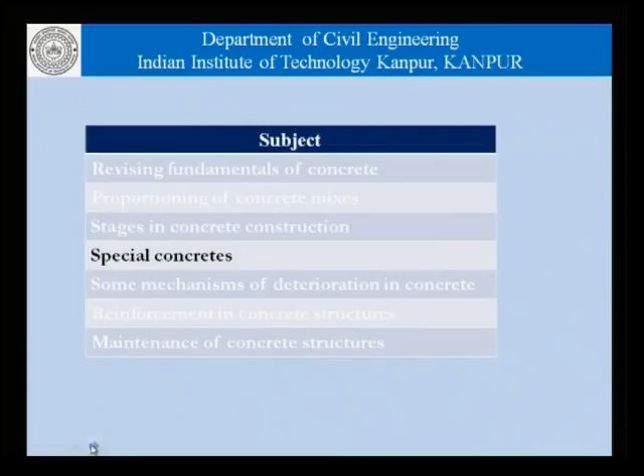Continuing our discussion on special concretes, where we were talking about high workability concretes in the last class, we had developed the following ideas.

Concrete, mortar and paste can all be modeled as a composite having a fluid phase with particles suspended in them. Paste can be modeled as cement particles suspended in water, mortar as sand particles suspended in paste, and concrete as coarse aggregate suspended in mortar. The properties of the composite, whether paste, mortar or concrete, can be determined by the properties of these two phases - in the case of concrete, the properties of the aggregate and the mortar, and also the volume concentration of the particles.

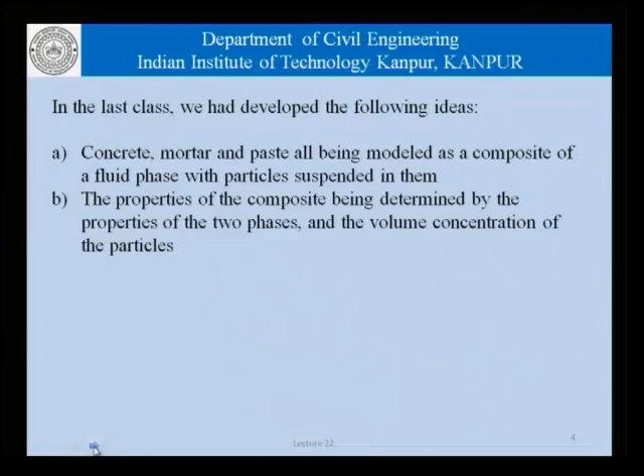That is, if you are talking of concrete, how much coarse aggregate is there in the composite by volume. We had also talked about the problems of segregation and particle interlock in the context of the carrying capacity of the fluid, the conditions of flow, and so on.

We have talked about the properties of the fluid phase, which can be modified by changing the concentration of particles therein, and superplasticizers help us directly in that context, and also using viscosity modifiers.

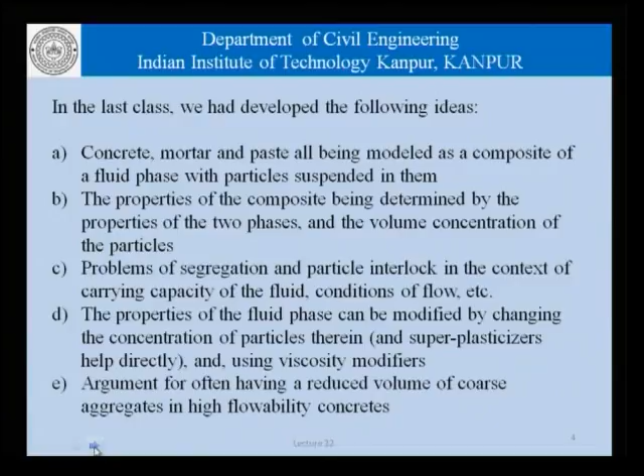We had also built an argument for having a reduced volume of coarse aggregates in high flowability concretes. In fact, there was a slide where we had said that depending on the concentration of reinforcement or the complexity of the shape in which the concrete has to be cast, the maximum volume of coarse aggregate in the concrete can be limited or needs to be limited.

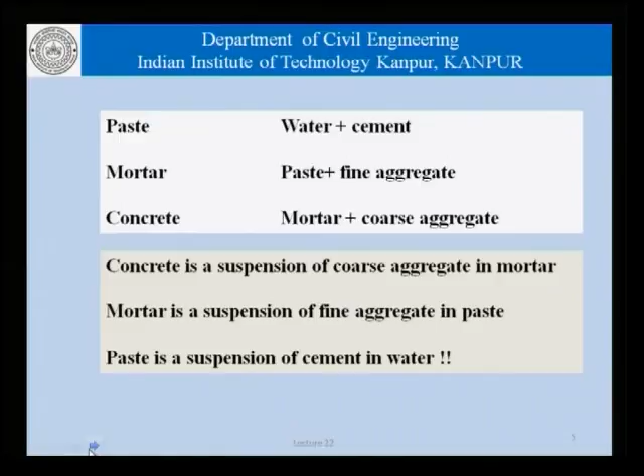Continuing with that discussion and reiterating that paste is water and cement, mortar is paste and fine aggregate, concrete being mortar and coarse aggregate, and the suspensions as we have discussed.

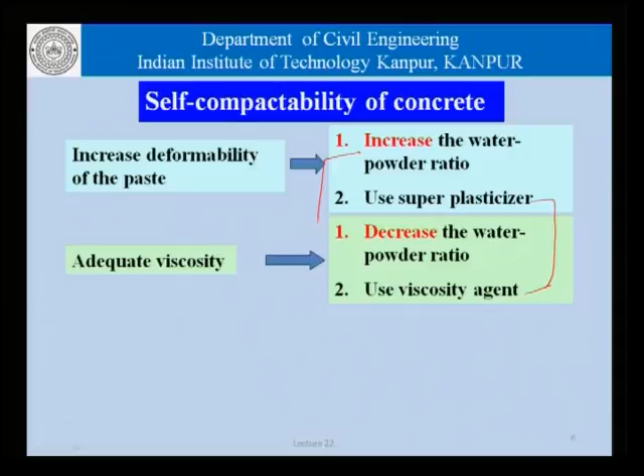We now talk about self compactability of concrete, where we said that on the one hand we need increased deformability of the paste, which calls for an increase in the water to powder ratio and the use of superplasticizers, and on the other hand we require adequate viscosity, for which we need to reduce the water powder ratio and use viscosity agents. So these two are the chemical admixture route, or the physical route where we are trying to change the water powder concentration in the system.

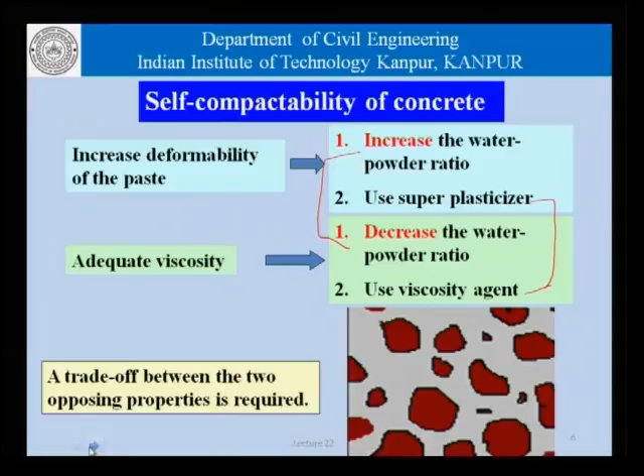Now, as far as the self compactability of concrete is concerned, or the high flowability of concrete is concerned, we are really looking at a trade off between these two opposing properties. One requires the paste phase or liquid phase to be more deformable, whereas the other requires the same phase to be less deformable. So it is basically a trade off.

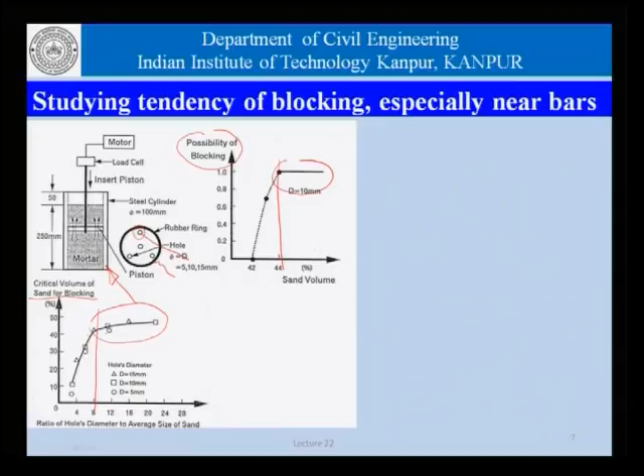Building on that argument, we had discussed this slide, which talks about the possibility of blocking and the critical volume of sand required for blocking if we were doing an experiment as shown here, where in a small cylinder we are trying to push a piston which has a configuration like this, having holes of different diameters, and these diameters are related to the particle size that we have, and we had talked about a sudden change occurring here and a relatively sudden change which is occurring at around this value here.

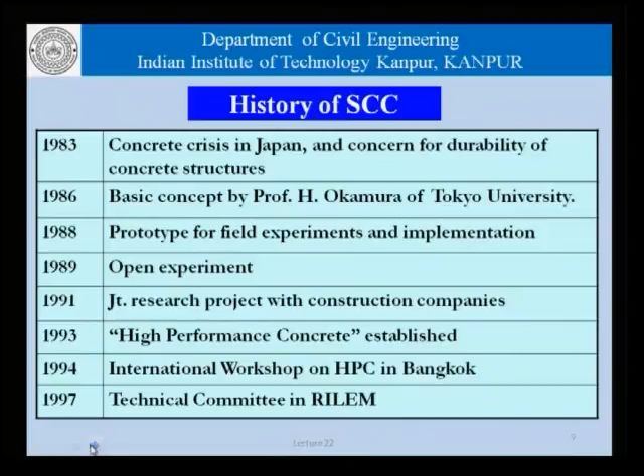We had also talked about the history of self compacting concrete briefly, starting from about 1983-84 to about 1997, an extensive amount of work was done in Japan and in other countries, notably the Netherlands, where the emphasis was on developing high deformability, high flowability and self compacting concretes.

On the other hand, there was a discussion and groups in the world working on high performance concrete interpreted slightly differently. They were working more in terms of increasing the strength of concrete. Now, coming to our discussion today, we will focus on

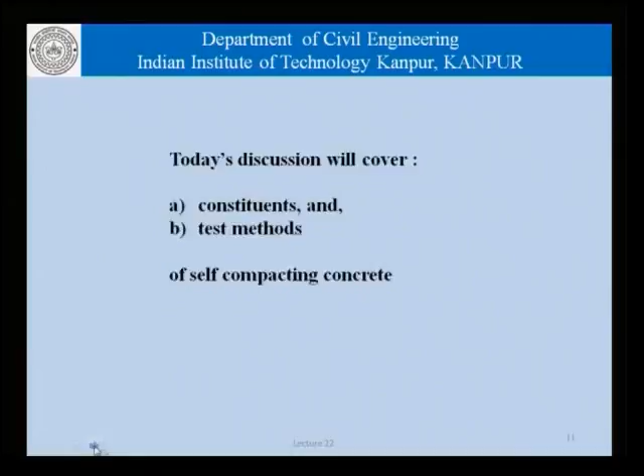self compacted concrete, that is SCC, one of the examples of high flowability concretes. In this case, in addition to high flowability, the concrete should have self compactability, that is, it should not require external vibration in order to be compacted. We will cover the constituents and the test methods of this special concrete. As far as what SCC is, it really is a flowing concrete mix that does not require additional or external work for consolidation in terms of internal or form vibrators, and consolidates under its own weight.

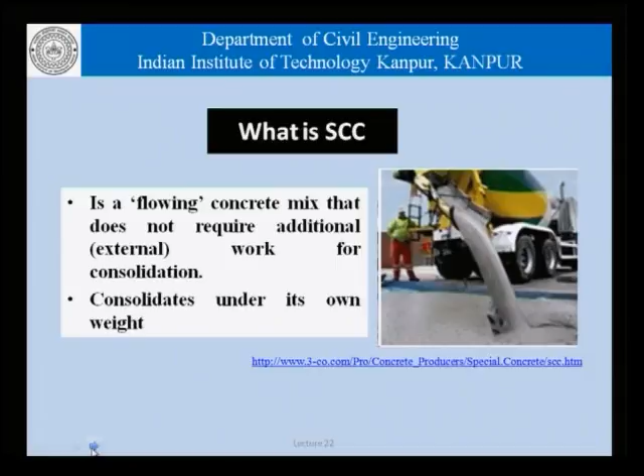So, as we can see from the picture here on the right, the concrete more or less flows as if it were a fluid. Now, the advantages of working with this kind of concrete, self compacting concrete, is that its highly fluid nature makes it eminently suitable for placing in difficult conditions, which could be sections with congested reinforcement, hazardous environments, and so on.

At times the arrangement of reinforcement is such that it makes it very difficult for concrete to be placed, for concrete to move through the reinforcing bars, and even if concrete can negotiate that gap, it is almost impossible to actually have a vibrator reach that area.

Similarly, there could be hazardous environments where we would like to limit the amount of exposure to human beings. We would like to have as few people working in that area as possible, and in these cases the use of self compacting concrete comes in very handy.

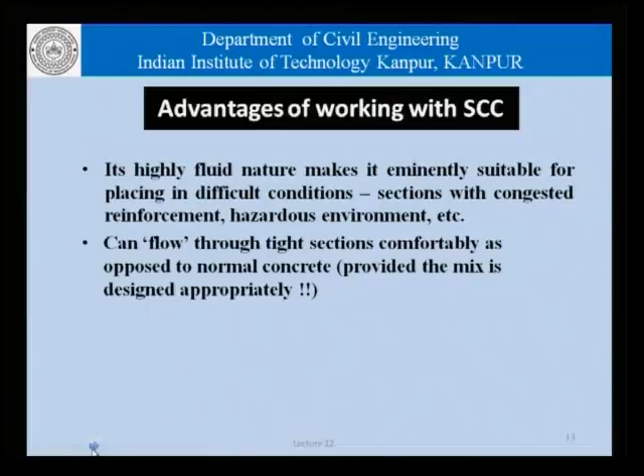As we said, it can flow through tight sections comfortably as opposed to normal concrete, of course, provided the mix is designed appropriately and has the right amount of segregation resistance.

It minimizes hearing related damage induced by the vibration of concrete at the work site. The use of vibrators, whether internal vibrators or form vibrators, is one of the major sources of sound pollution at a construction site, and if we are able to get rid of that, we have a much more silent construction site.

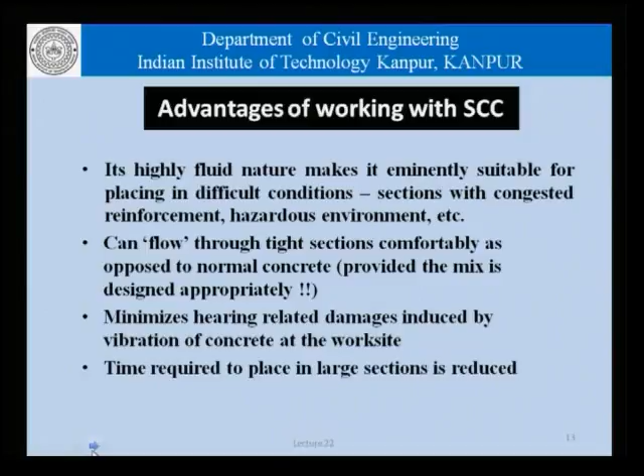Indeed, the time required to place concrete in large sections is also greatly reduced, because the concrete virtually flows rapidly into the form that is being cast in.

Here are examples where self compacting concrete would be eminently suitable. For example, if we look at this picture here, we can see that the reinforcement is so dense that it would be impossible for concrete to penetrate these small patches between the reinforcing bars, save the self compacting or a very highly deformable concrete.

Only that concrete which literally flows like water can be poured into the formwork, and it can be expected that it will flow through these openings or gaps and set in a manner that a reinforced concrete designer would like it to.

On the picture here is the anchorage of the 4A of the Akashi Kaikyo bridge, one of the major bridges in Japan, and I would like you to understand or study a little bit more on how the self compacting concrete was used in this large anchorage.

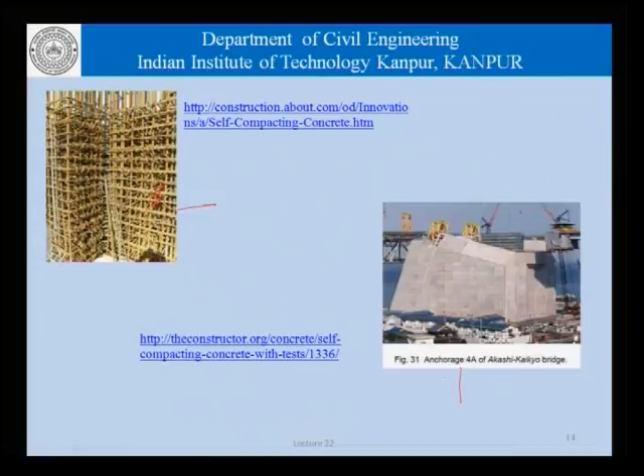As far as the ingredients of self compacting concrete are concerned, they are no different from the usual: cement, other cementitious materials, fly ash, blast furnace slag, microsilica, stone dust, aggregates which is fine and coarse, and admixtures.

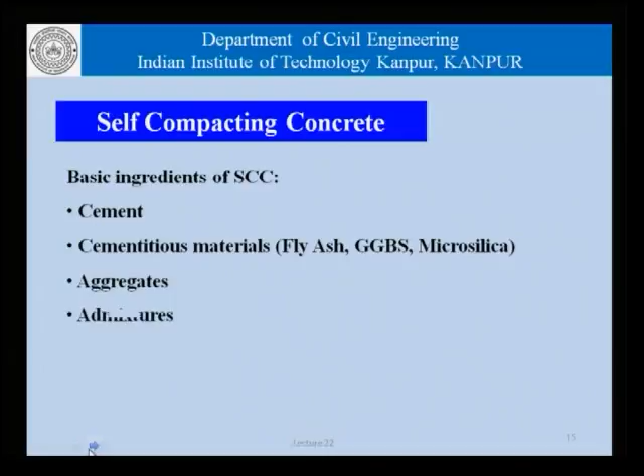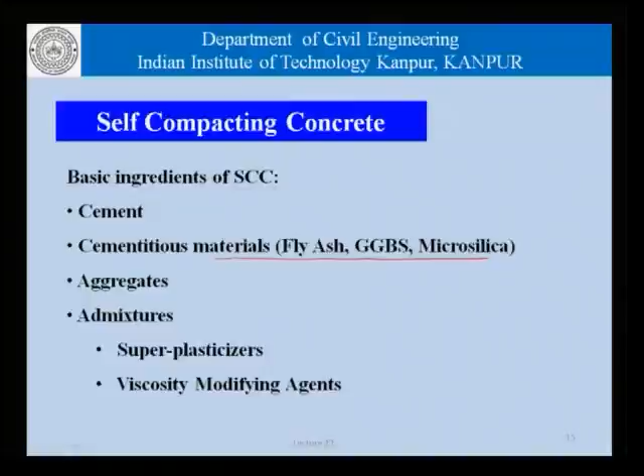These could be superplasticizers or viscosity modifiers. Now, we land up using a lot of these cementitious materials in self compacting concretes for the simple reason that we need to have a higher volume of paste, a higher powder content in the mix. This is something which we talked about last time, and we will look at it once again today.

As far as cement is concerned, we can obviously use almost any type of cement. The typical cement content is no different from normal concrete. It is about 350 to 450 kgs per cubic meter.

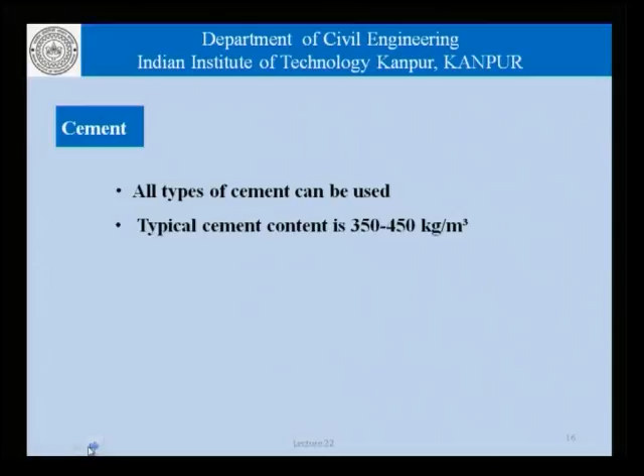And if we use higher cement content, obviously, we will land up with higher shrinkage and thermal stress issues. Therefore, even though we require a higher paste volume or a higher powder volume in the paste, it is not always advisable to use cement.

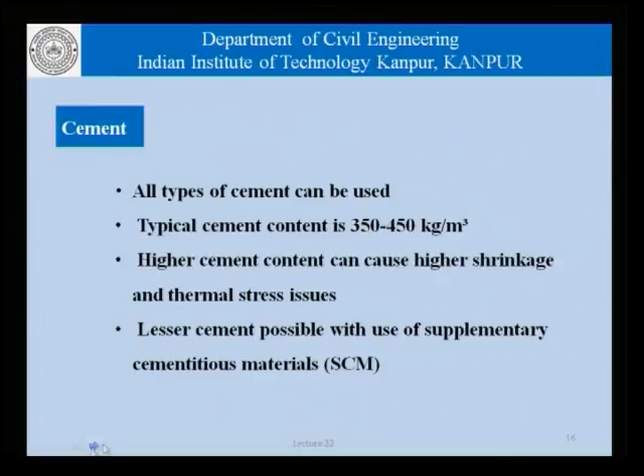We would rather use materials of similar fineness, but not having the hydration related issues in terms of heat and so on. As we have stated, lesser cement content is possible by the use of these supplementary cementitious materials.

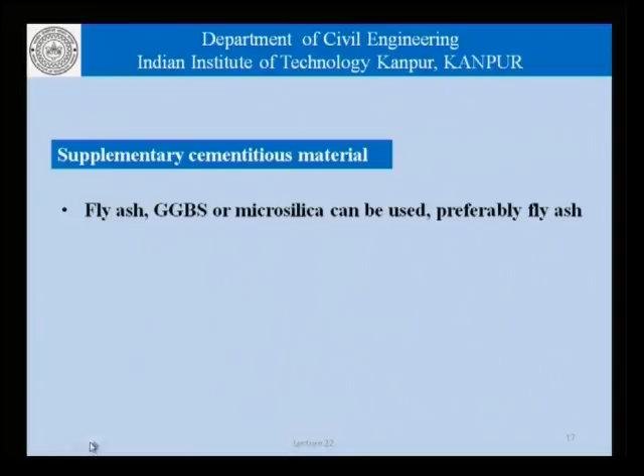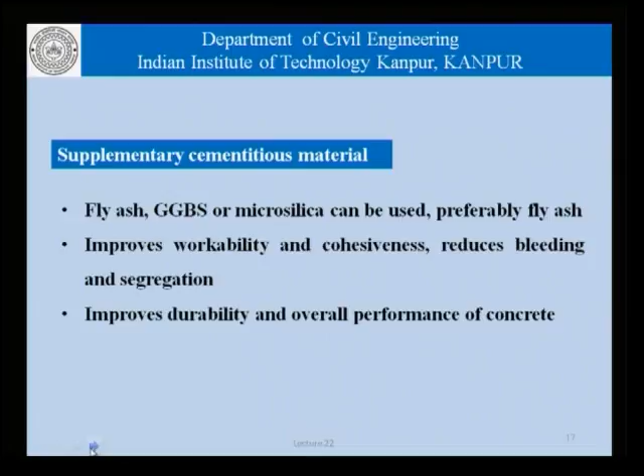As far as these materials are concerned, we could use fly ash, blast furnace slag, or microsilica, preferably fly ash because of its spherical nature. Their use improves the workability and cohesiveness, reduces bleeding and segregation, improves durability and overall performance of the concrete.

As far as the viscosity modifying admixtures are concerned, these are of various chemical nature and provide or correct the desired rheological profile to the self-compacting concrete. They improve the segregation resistance of the mix without loss of workability.

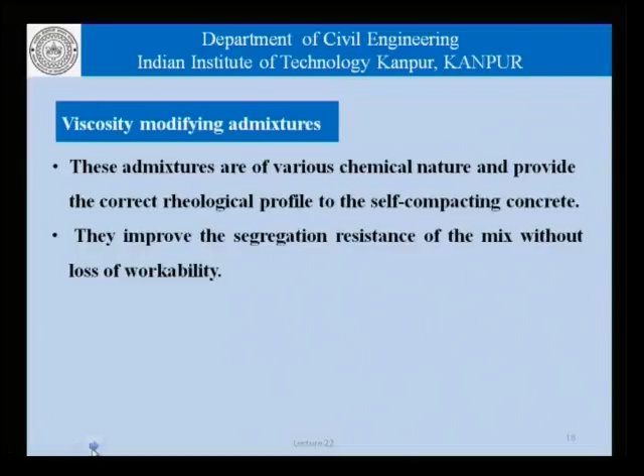They also help to reduce performance fluctuations due to variations in the material quality and the moisture in the aggregates. This helps us maintain a consistent quality as far as self-compacting concretes are concerned.

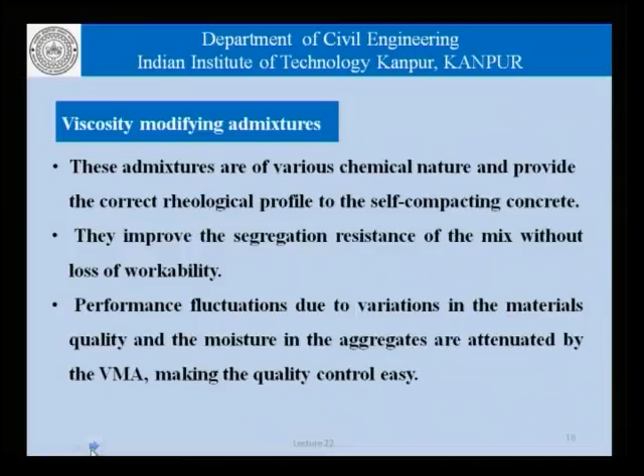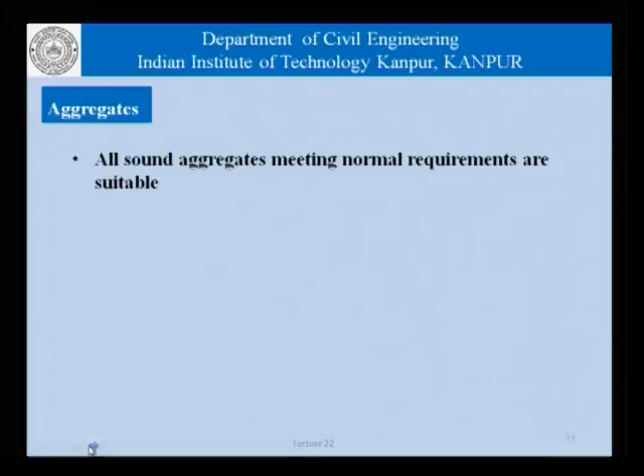Coming to aggregates, all sound aggregates meeting normal requirements are suitable. We must remember that with a material like concrete, it is very difficult to specify very special kinds of aggregates, whether fine or coarse, because concrete as a construction material is economical only if we use locally available material to the extent possible.

The only factory made product used is cement, and that is where we can have some specification that this cement and not that cement, this particular chemical composition and not that one, and so on. But if we become very choosy with respect to aggregates, that will push the cost of concrete beyond a certain point and make it uneconomical. So, no matter how special the concrete becomes, the engineer always tries to use local material, and to that extent all sound aggregates meeting normal requirements are suitable for use in self-compacting concretes as well.

These aggregates could be natural or crushed aggregates of any mineral composition - limestone, dolomite, quartz, basalt, whatever - except that the usual rules as far as alkali aggregate reaction will apply. We do not want to use reactive aggregates.

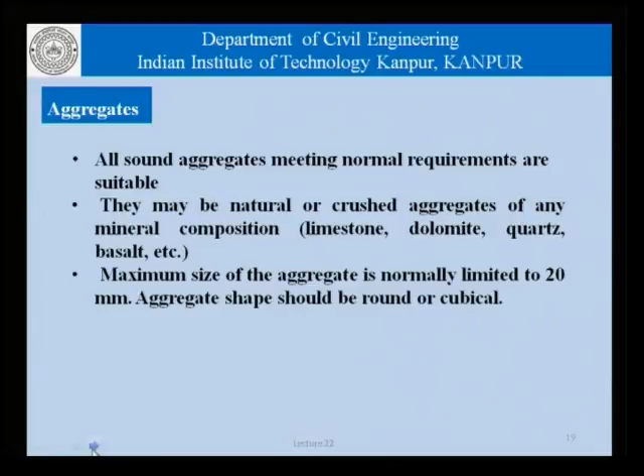As far as the maximum size of the aggregate is concerned, that is normally limited to about 20 mm, and aggregate shape should be round or cubical. This is something we need to be a little careful about as far as its use in self-compacting concrete is concerned.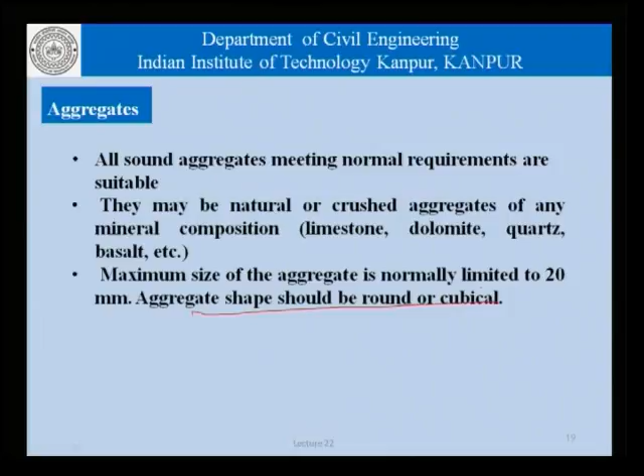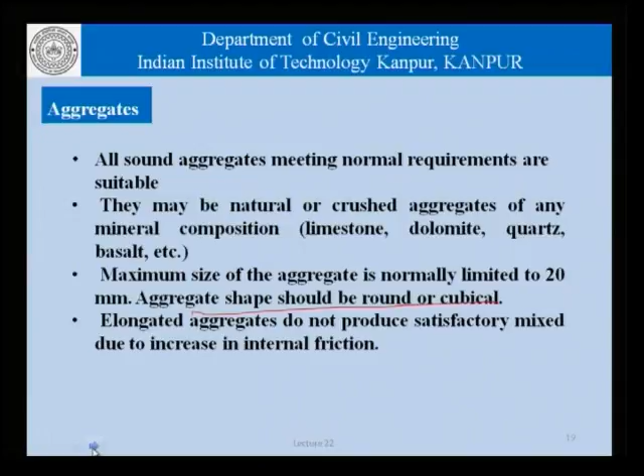Elongated aggregates do not produce satisfactory mixes due to increased internal friction and their tendency for aggregate interlock. That is something we would like to watch out against in self-compacting concretes. In normal concretes, because we use vibrators, we have the possibility to break aggregate interlocks, but in self-compacting concrete we cannot afford that.

Similarly, we cannot afford aggregate interlock in equipment or in piping and so on. So we must ensure that as far as aggregates are concerned, they are at least rounded or cubical in nature.

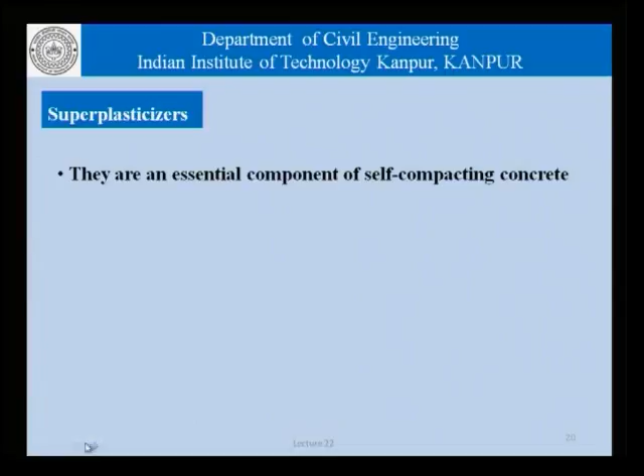Coming to superplasticizers, they are an essential component of self-compacting concrete because they help us reduce the water content. As far as these admixtures are concerned, normal sulfonated melamine formaldehyde, naphthalene formaldehyde condensate, and polycarboxylic ether based superplasticizers are commonly used.

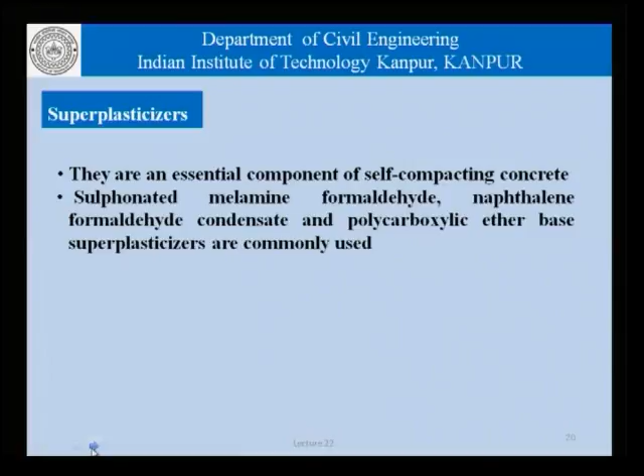Depending on the chemical composition of the cement, there may be issues relating to compatibility of a particular admixture with the cement, and that is something which needs to be established from time to time at a construction site.

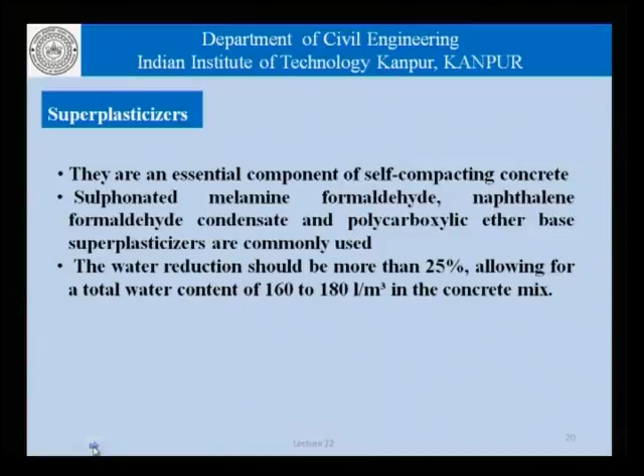As far as these admixtures are concerned, the water reduction achieved should be about 25% or more, so that the total content of water is restricted to about 160 to 180 liters per cubic meter. Anything more than that would make the demand on the powder content simply too high.

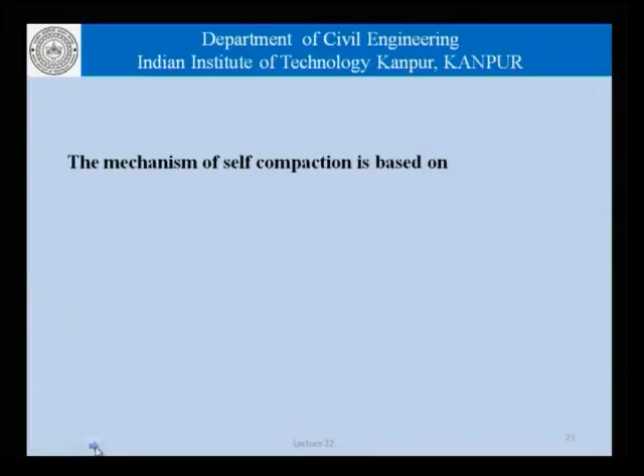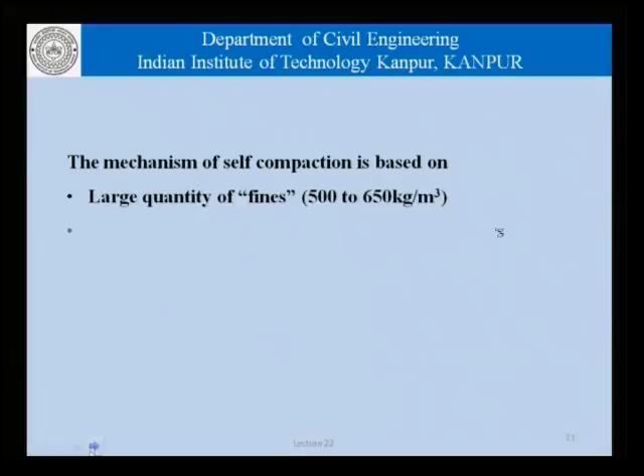Now, the mechanism of self-compaction in self-consolidating concrete is based on the large quantity of fines of the order of about 500 to 650 kgs per cubic meter, the use of high range water reducing superplasticizers in the range of more than 25% water reduction, and viscosity modifying admixtures. So it is these three principal factors, or a combination of these factors, which helps us obtain self-compactability in concrete.

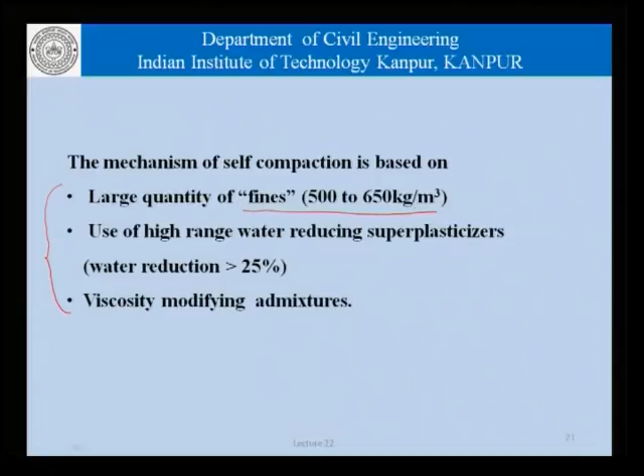So when we are talking of a large amount of fines, we can imagine that if we are looking at 500 to 650 kgs per cubic meter of fines, this is not including the fine aggregate. This is really the fines in the sense of cement and particles which are of similar size. So we cannot obviously have this amount of cement sitting in a concrete matrix.

So the cement content has to be restricted to about 350 to say 450, and therefore, by the requirement of self-compactability, we need to have at least 200 to 250 kgs per cubic meter of either a supplementary cementitious material which will participate in secondary pozzolanic reactions or secondary hydration, or a material which, even if it does not participate in that secondary hydration, contributes to increase the viscosity of the paste phase.

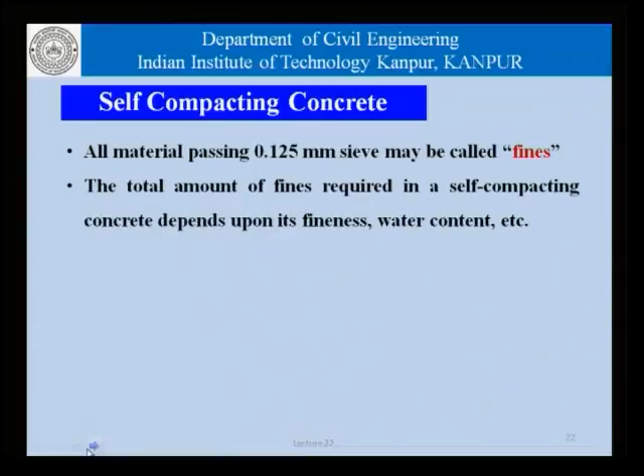Now, coming to self-compacting concrete, all material passing through a 0.125 mm sieve may be called fines, and that is how we were trying to define fines in the previous slide. The total amount of fines required in a self-compacting concrete depends upon its fineness, the water content, and so on. Pozzolanic materials will contribute to strength, and their effect should also be considered in the mix design.

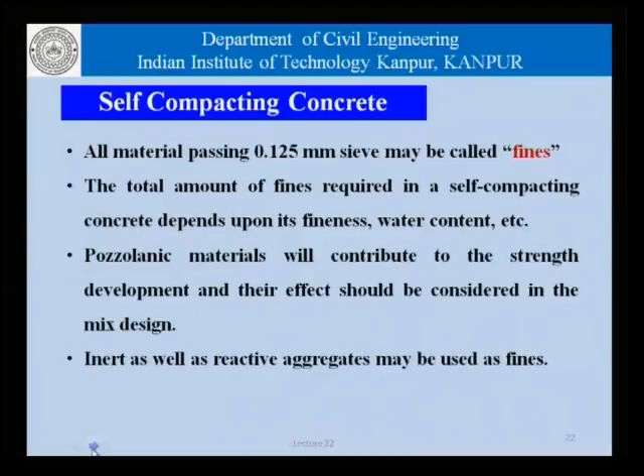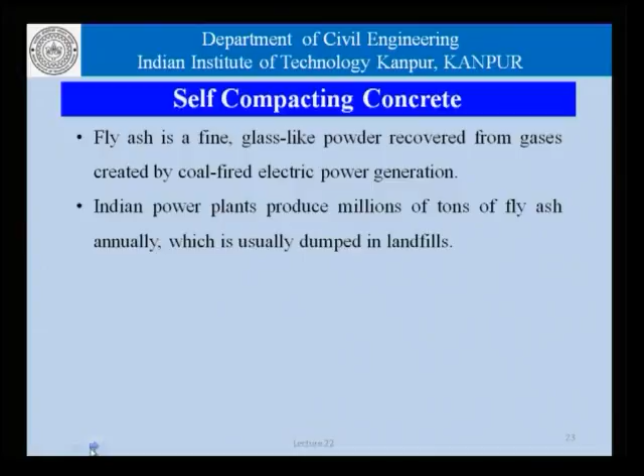Of course, we could use inert as well as reactive aggregate sometimes in fines, but with caution. Now, fly ash is one of the most commonly used supplementary cementitious materials and is a fine glass-like powder recovered from flue gases created in a coal fired electric power generation or thermal power plant. As far as India is concerned, we produce millions of tons of fly ash, but it is usually dumped in landfills.

Fly ash is an inexpensive replacement for Portland cement in concrete, while it actually improves the strength and segregation resistance and also the ease of pumping. Of course, it should be noted that not all fly ash can be used.

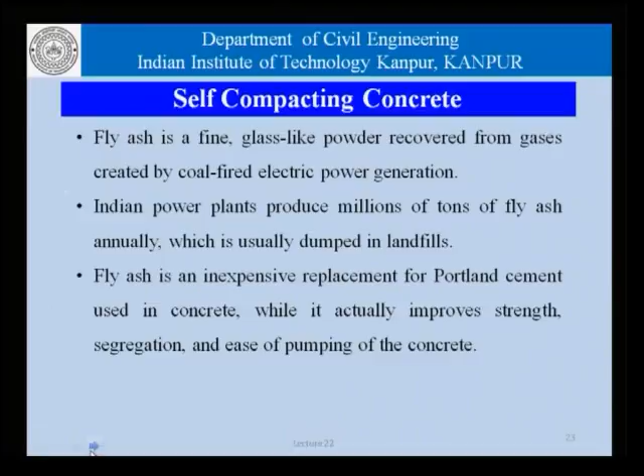It is not only the size and reactivity that matter, but also the fact that the properties depend on the coal which is used, the fineness, the burning temperature, and so on. So if there is a lot of variation in the quality of coal used in a thermal power plant, the quality of fly ash is also likely to vary.

This variation is one of the reasons why fly ash has not really become an absolute replacement for cement. Sometimes we get very good fly ash, and sometimes we do not get such good quality. That is why, as far as specifications and engineers are concerned, we cannot make a blanket statement that we can use large volumes of fly ash in a given concrete. Of course, if an engineer is conscious of that and does periodic quality control, there is absolutely no reason why fly ash cannot be used.

It is an ideal material for self compacting concretes. Now, if we look at the typical mix proportions by weight of normal concrete and self compacting concrete, these numbers here are those for normal concrete, and these numbers are for self compacting concrete. We are able to see the proportions by weight for both mixes.

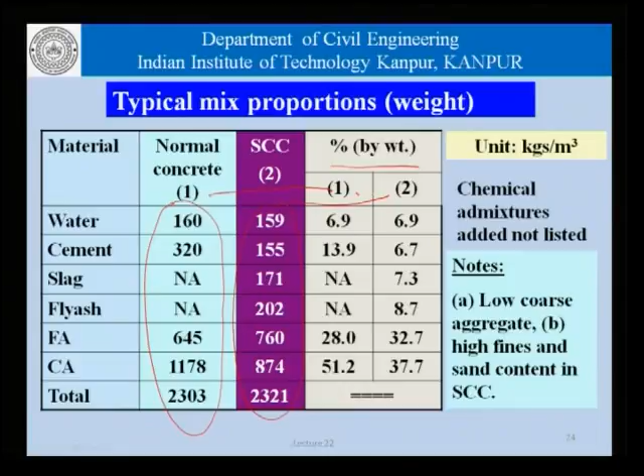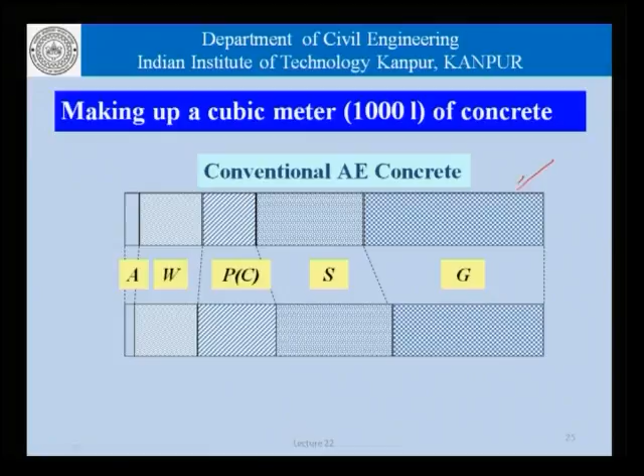Now, if this data was converted to a volumetric chart showing air, water, powder or cement, sand and gravel, this here is the distribution as far as normal conventional air entrained concrete is concerned, and the picture below is that of a typical self compacting high performance concrete.

If we look at the numbers, in both cases we can assume the air content is not really different, it is the same 2%, and water is about the same. As far as powder, cement or fines is concerned, there is a marked difference: about 10% in conventional concrete, whereas in self compacting concrete it could be as high as 18 to 20%. The sand is not really so much different, and this increase is compensated by a corresponding decrease in the coarse aggregate percentage.

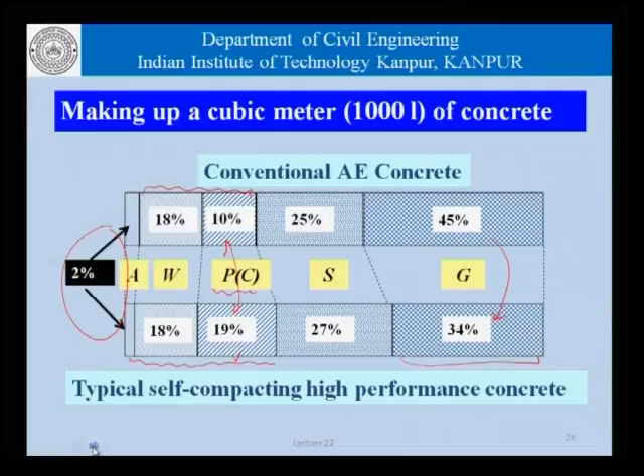So in the end result, self compacting concretes have a larger paste volume compared to conventional concretes, and this is compensated by the reduced volume of coarse aggregates. This is something we talked about last time, and we had also seen a slide talking in terms of limiting the coarse aggregate content between 28 to 35%, depending on the complexity of the formwork or the member in which self compacting concrete is to be cast.

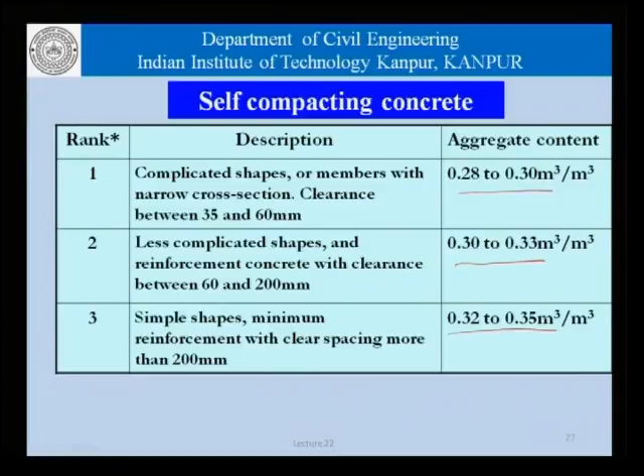This ranking given here, rank 1, 2 and 3 for the aggregate content, is based on tests for self compactability, and the level of resistance at obstacles is varied for the tests in the three ranks.

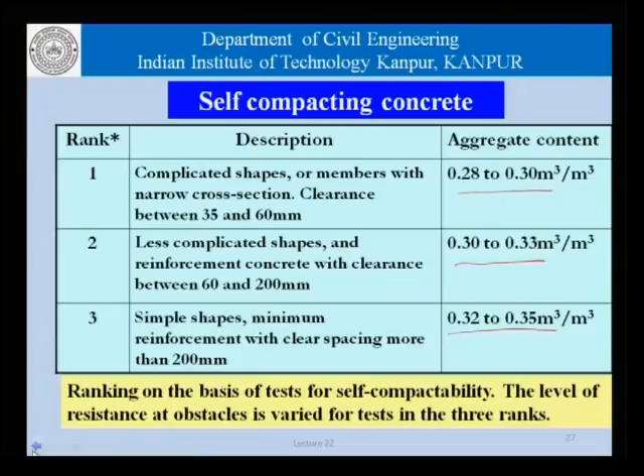Now, when it comes to testing of self compacting concrete, that is really the second part of our discussion today. Let us talk about how we actually test self compacting concretes, which is different compared to conventional concretes. Conventional concretes we test in terms of workability and air content, maybe sometimes bleeding tests or setting time and so on. As far as workability is concerned, we do slump, compaction factor and so on.

But when it comes to self compacting concretes or high flowability concretes, the material is beyond the classification range of a slump test. We need more specialized tests, and that is what we are going to talk about. Some of the tests we will discuss today are the slump flow, the V funnel, the L box, the U box, the fill box, and the J ring.

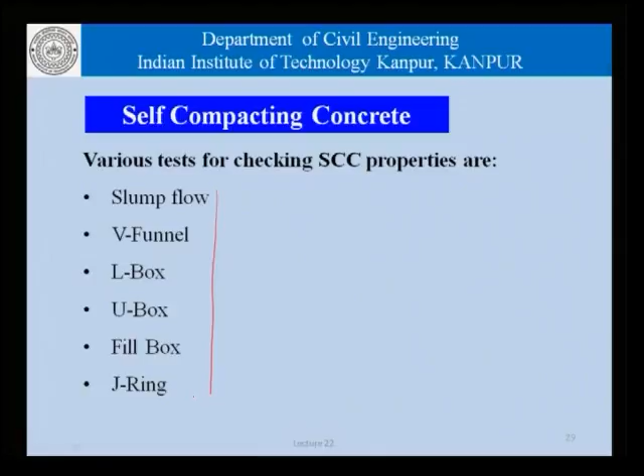These tests give us an entirely different framework in which a self compacting concrete can be evaluated. We must remember that self compacting concrete has been developed only about 25-30 years ago, and therefore a lot of these tests are still in some form of development. Some have been standardized, and you can look up ASTM or European standards on that, but some are still evolving and would sooner or later become part of a standard quality control regime for quality assurance programs of self compacting concretes. It is not only self compacting concretes, but these tests can also be used to evaluate the workability of any other high flowability concrete. Air content and so on can be tested in a manner similar to conventional concrete. Now let us take a look at these tests one by one.

Coming to the slump flow, the test aims at investigating the flowing ability of the self compacting concrete and measures the spread, the diameter of the slump being a measure of that flowability, and indicates the free unrestricted deformability of the concrete.

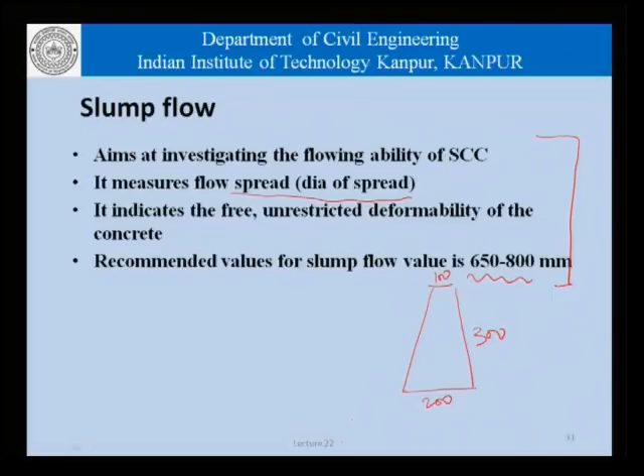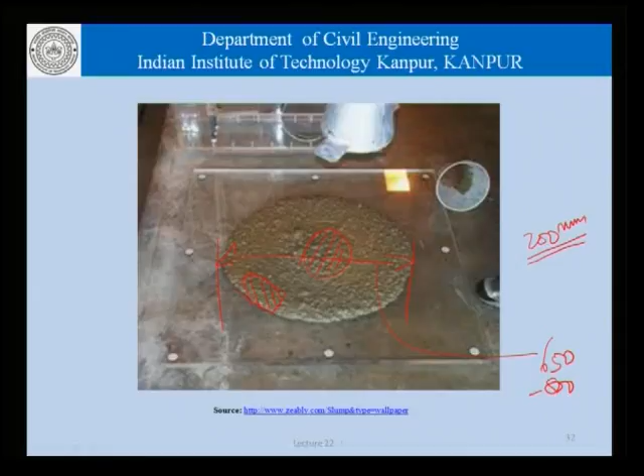When we are evaluating the concrete using the slump flow, we should also watch for aggregates having reached the edges. It should not happen that the concentration of aggregates in the periphery of the slump flow spread is different from the aggregate concentration in the center - that is what is likely to happen if the concrete is segregation prone. If the concrete is segregation prone, the aggregate would not move with the mortar towards the periphery.

As a corollary to the slump flow test, we also sometimes use a flow time, which is sometimes called the T500 test. This T500 refers to the time it takes for the concrete to achieve or reach a diameter of 500 millimeters, and the typical time could be in the range of 2 to 5 seconds. As the slump cone measuring 200 millimeters in diameter is lifted, the concrete spreads in all directions, and we look at the time it takes for the concrete to reach a diameter of 500 millimeters - this time is called the T500.

Depending on the kind of viscosity of the mortar, it is possible that for the same slump flow - the final diameter that the concrete achieves - the T500 times could be different. Obviously the T500 would be higher for a concrete which is more viscous, and the concrete being more viscous really means that the mortar phase has a higher viscosity. So even though we are not measuring viscosity directly, parameters such as the T500 help us to determine and compare the viscosity of two concretes which have the same or different slump flows or final spreads.

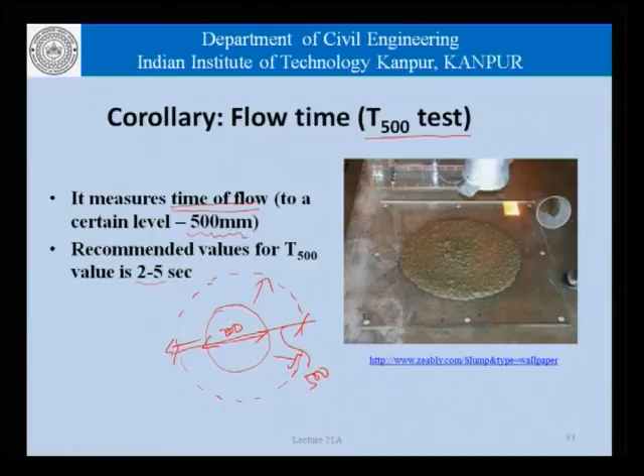Now, if we look at the slump flow test once again, we would realize the import of the free unrestricted deformability. The concrete in the slump cone, as it flows out, is unencumbered - it flows out freely without any obstacle or obstruction to its flow, and that is not something we have in most reinforced concrete structures. In most cases, the concrete is expected to negotiate reinforcing bars, and that is something the slump flow itself does not measure. So most of our tests beyond this point have this parameter added into the testing regime.

Now, if we come to the V funnel test, the test gives us the time for a certain volume of concrete to pass through a narrow opening. It gives an indication of the filling ability, provided that no blocking and or segregation occur.

Concrete samples would depend upon the size of the V funnel. It could be about 12 to 14 liters, and the time would vary between 6 and 12 seconds.

If we have concrete filled in this funnel, which measures about 500 millimeters on top, a width of about 75 millimeters, and a height of 450 millimeters, with a constricted region of about 150 millimeters, what we expect is that the concrete filled in this portion, there is a lid which when opened allows the concrete to flow through, and the time it takes for the concrete to flow through is the V funnel time.

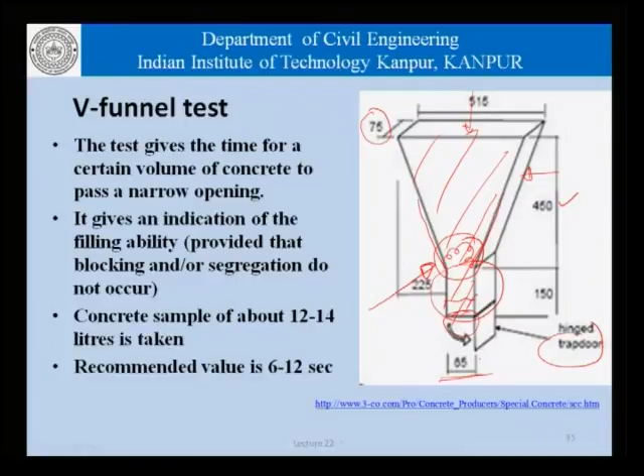Now, coming to the third test, the L box. This test has an L box, that is, there is a box here which is, let us say, A, and another portion which is, let us say, B, and we fill the concrete in A. There is a gate which is closed, and once we lift this gate, the concrete from block A flows into block B.

Now, this flow from block A to block B is restricted by the presence of pipes or reinforcing bars or any such arrangement that we may choose to use. Some standards have standardized the kind of obstruction that can be used, in the form of pipes of different diameters or reinforcing bars of different diameters, such that the space is divided into different open spaces. So, the kind of obstruction used here is somewhat related to the kind of reinforcement in an actual structure which the concrete is expected to negotiate.

So here too we have the possibility of aggregate interlock occurring behind the reinforcing bars, which would prevent the concrete from block A flowing into block B. The kind of measure used for testing the L box is largely the difference in height at these two places, H1 and H2, and then there is this delta H.

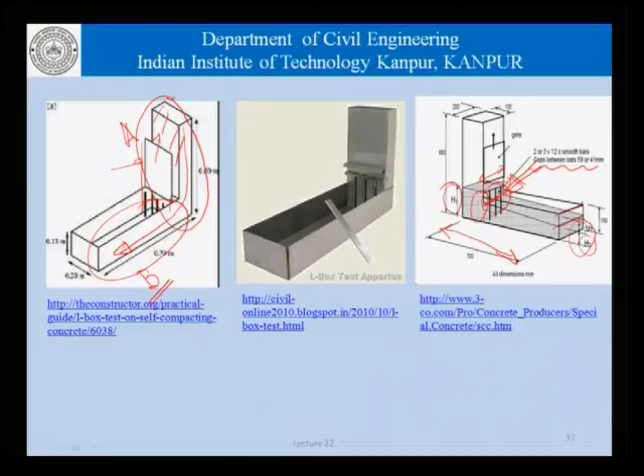If the concrete was to behave as a real fluid, we would not expect any difference in height over the length that the concrete is flowing. But since the concrete at the end of it is not really a fluid, there will be a certain difference in the heights at these two places, and that is what we want to monitor and measure as the output from this test, called the L box test.

As I explained before, this is what is given in the text here. The method is useful to investigate the passing ability of self-compacting concrete, the ability of the concrete to negotiate the simulated reinforcing bars. It measures the reached height of fresh SCC after passing through the specified gaps of steel bars and flowing within a defined flow distance, shown to be about 700 millimeters in the previous slide. With this height reached, the passing or blocking behavior of the self-compacting concrete can be estimated.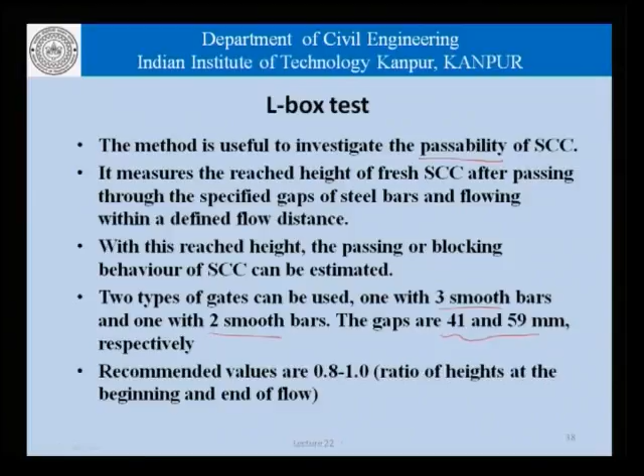Two types of gate can be used, one with 3 smooth bars or 2 smooth bars. The gaps would be different depending on the diameters of the bars used, and we have standards which help us evaluate a concrete from this point of view, the L box test, using the ratio of the heights at the beginning and end of the flow.

As we have stated in different lectures in this module, test methods are always such that they would yield a value. Any test would yield a value, and a specification is something which the engineer has to state: if we carry out this test for this application, this is the value which is acceptable. So for self compacting concretes, we can have different tests, and the engineer can lay down different specifications.

As far as the L box test is concerned, I want a concrete which has a ratio of the two heights to be, let us say, 0.9. As far as the funnel test is concerned, I want a concrete which should not have a time of flow greater than say 10 seconds. It should not have a slump flow less than 55 centimeters or 550 millimeters, and so on. So this is the basic concept in terms of testing of self compacting concretes.

Continuing with the tests, let us look at the U box test. As the name suggests, it talks about the flow of concrete in a U shaped box. Concrete is filled on one end of a U box, closed initially with a gate, and this gate has an obstacle which simulates reinforcing bars. Once the gate is opened, the concrete flows from one end to the other, and we can talk in terms of this height or the difference in these two heights.

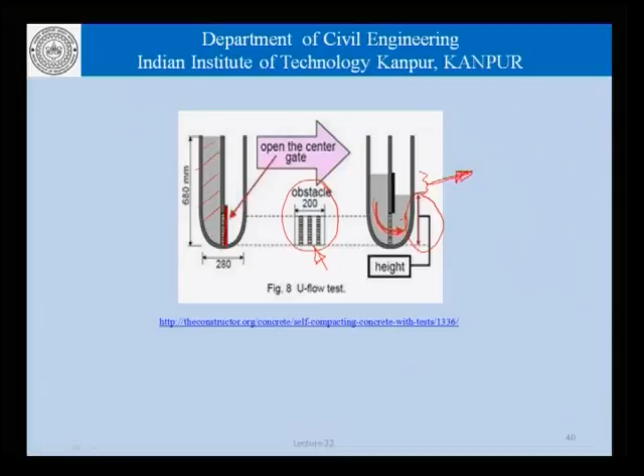If the concrete was a fluid or a liquid in that sense, we would not expect any difference in the heights on the two sides of the U. But because concrete is not a true liquid, we will expect a certain amount of difference, and that difference would be the measure of the self compactability of the concrete. The smaller this difference between the two sides, the more self compactable the concrete can be stated to be. Again, this gate or obstruction that we design can be modified or chosen to represent the kind of reinforcement that we use.

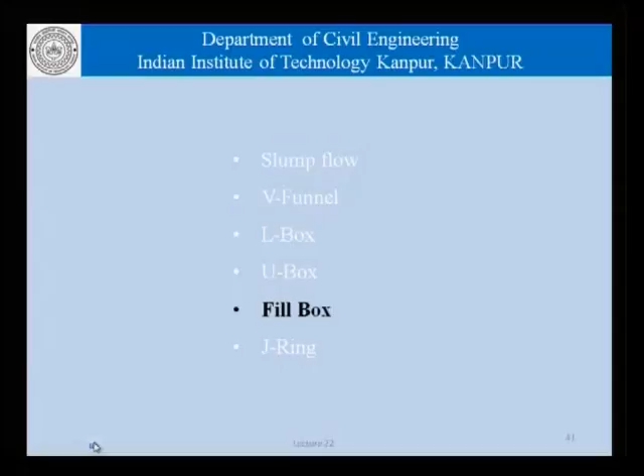Coming to the fill box test, which is a slight variation of the test we used earlier. This test deals with the concrete's ability to fill a box once the concrete is placed at one end. These pipes here represent the actual reinforcing bars or the reinforcement in a reinforced concrete structure. So depending on the complexity of the reinforcement we are emphasizing in a particular application, we can change the diameter and spacing of these bars and have the concrete fill this box.

Normal concretes, as we can imagine, will not be able to negotiate the gaps between the simulated reinforcement almost at all. It is only after a certain amount of self compactability, or a higher level of deformability is achieved, that we will get some semblance of a horizontal surface, which is what we finally want in a truly self compacting concrete.

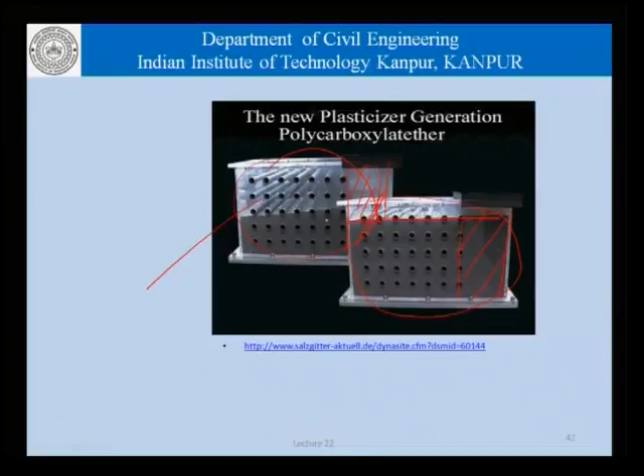Last of all in this series of tests, let us talk a little bit about the J-ring. The J-ring test aims at investigating both the filling ability and the passing ability at the same time, and indicates the restricted deformability due to blocking effect of reinforcing bars.

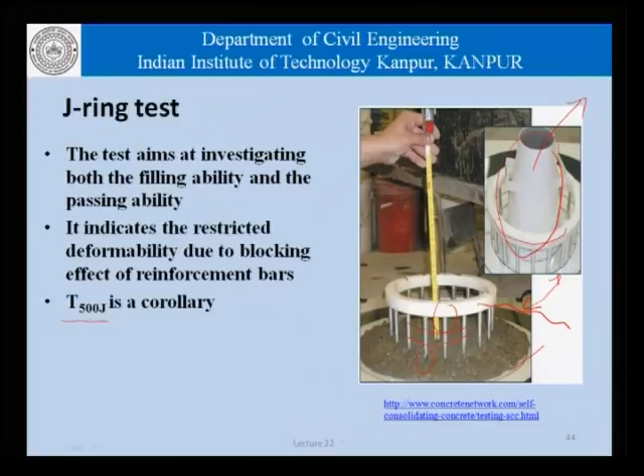A variation of the T500 time that we talked about as a corollary to the slump flow is the T500J. The T500J is the time it takes for the concrete to achieve a diameter of 500 millimeters when tested with a J ring.

T500 was the time it took for the concrete to reach a diameter of 500 without any obstacle to its deformation. This J is the added suffix that helps us find the viscosity of the concrete with the modified slump flow, using a J ring. These pictures show another view of the J ring test.

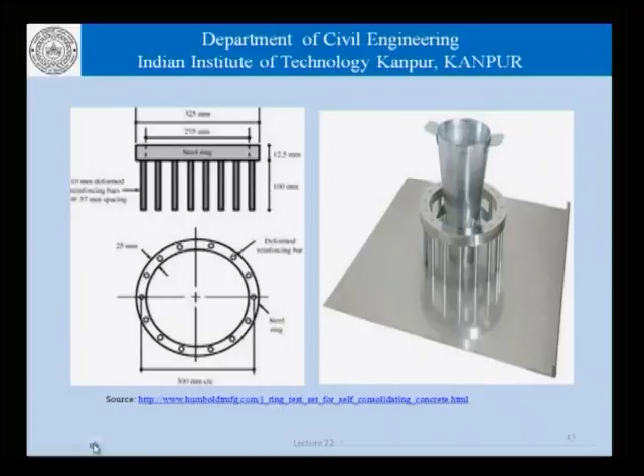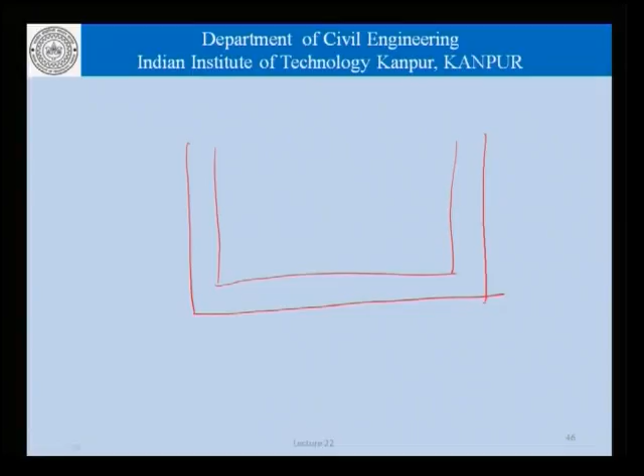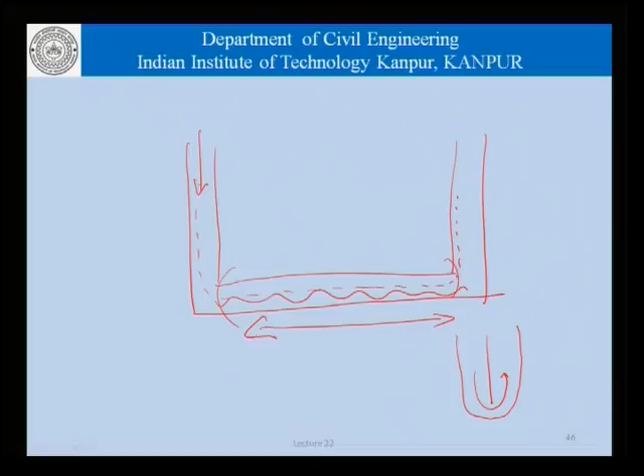There is another test we haven't discussed, involving concrete passing through a large U tube over a substantial distance. We place the concrete, expect it to flow the full distance and rise in the tube. It's a variation of the U box test, except the concrete doesn't just flow from one leg to the other but passes through a reasonably long distance. As it goes through, we can introduce obstacles in the path and still expect the concrete to negotiate the barriers we put in place.

This kind of test, because of its size, can also help us evaluate properties of concrete at the pouring end of the flow and at the end where the concrete reaches. We can take core specimens after hardening and strength development, and try to find properties such as strength, maybe even particle size distribution of coarse aggregates, to conclusively establish that the concrete at both ends is really the same and did not segregate while negotiating the whole path.

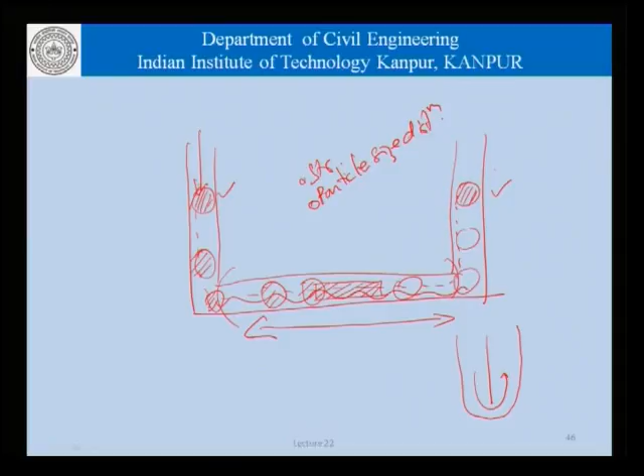Before we close, as usual, we will have a series of items we could look into a little more closely to get a better understanding of self-compacting concretes.

We could make a list of case studies where self-compacting concrete has been used, and study from that list of projects how self-compactability was achieved in these cases. We have talked about different routes - increasing powder content, use of chemical admixtures like superplasticizers, or use of viscosity modifiers. These are some routes we talked about in theory. Once you look at actual concrete mixes used in different projects, it would be possible to understand which route was taken to achieve self-compactability in these cases.

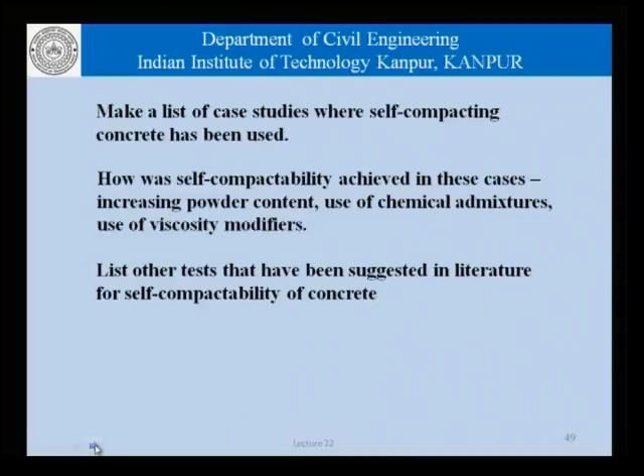We have talked about some tests today to give insight into the different variations proposed and used in different standards to evaluate self-compactability of concrete. There are several other tests we didn't have time to cover, and we could make a list of other tests suggested in literature for self-compactability of concrete. As a corollary, we could have a list of standards that address the tests we used today - the slump flow, the J ring, the U box, and so on.

There are variations even in the slump flow test, and I would like you to examine some standards describing the slump flow test. Learn more about these tests as we have discussed. Seeing is believing - there are several videos and movies available on the internet which you could watch to see how these tests are actually carried out. Once you see these tests being carried out, it will give you a much better understanding of the deformability, how concrete flows in the slump flow test, and how high flowing concretes are placed in more congested formworks.